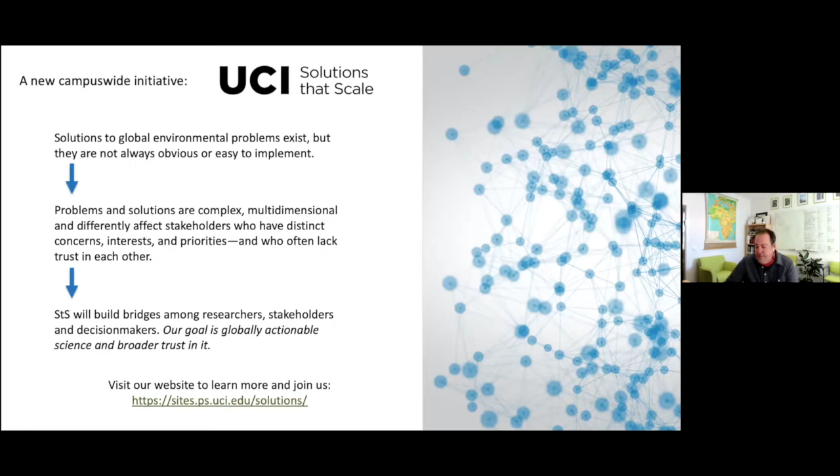This is why net zero matters, because we need to stop adding CO2 to the atmosphere in order to stabilize global temperatures. The net is because it may not mean that we've completely eliminated CO2 emissions to the atmosphere, but there may be ways of balancing the scales such that if we do have to add CO2 to the air, we're taking out the same amount on the other end to maintain the cumulative and thus stabilize the climate.

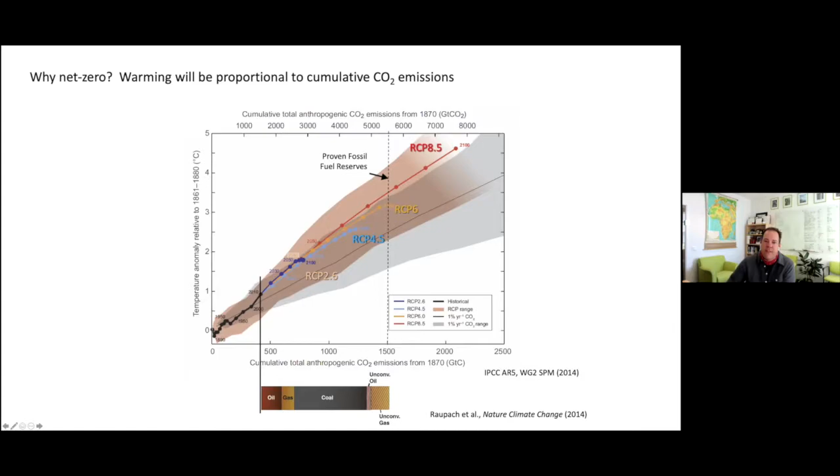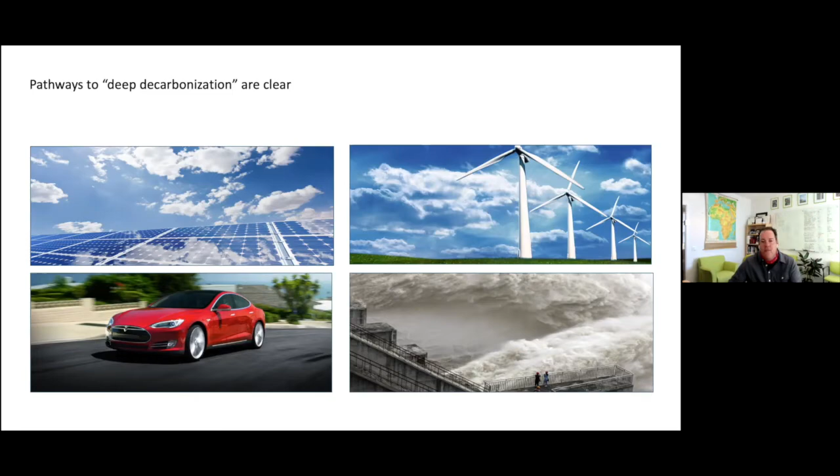But there are some modern energy services that we expect will be much more difficult to fully eliminate emissions from. And so, although that progress is there and we have a path on how to drastically reduce our emissions, this talk is going to make the claim that it's time to now focus on those harder pieces of the energy system and figure out scalable solutions that can work for them. So in particular, I'll spend the rest of the talk focusing on 3 different areas of energy and energy services that are going to be tough.

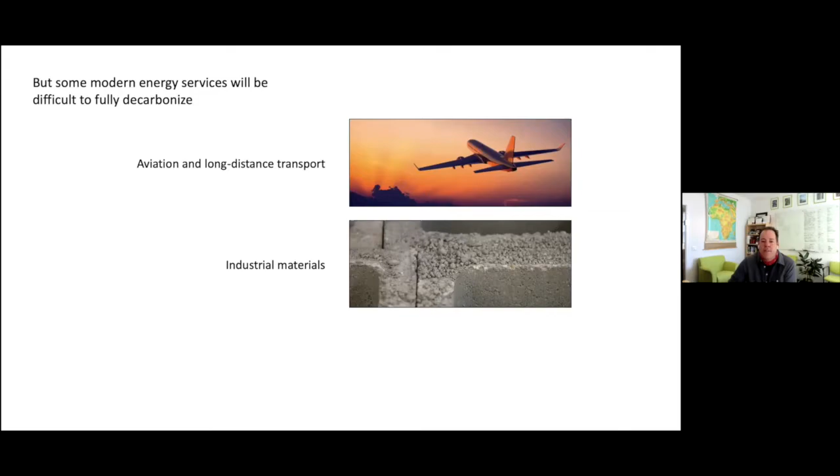So the first is aviation and long distance transportation. And the second is industrial materials. In particular, things like cement here or steel are things that are going to be a little more tricky than just light duty vehicles. And then lastly, we have those solar and wind technologies that are going to go a long way to getting us to a carbon-free electricity sector. But we need to figure out how we can completely eliminate fossil fuels from that sector and still maintain high reliability. And so I'll spend some time talking about that.

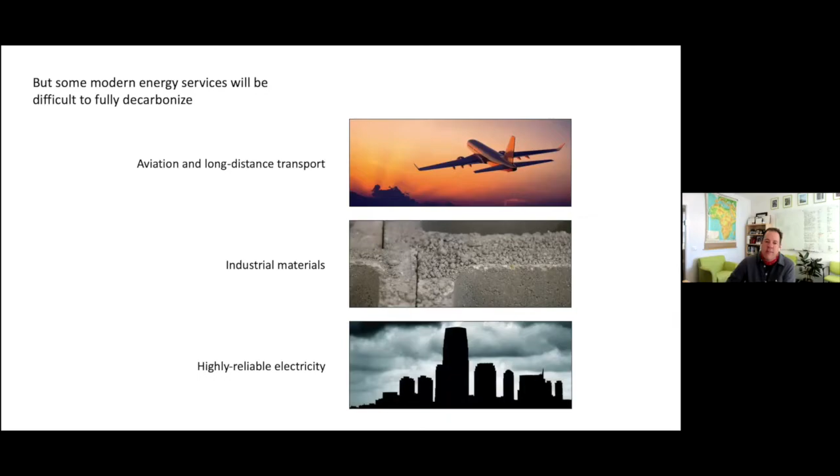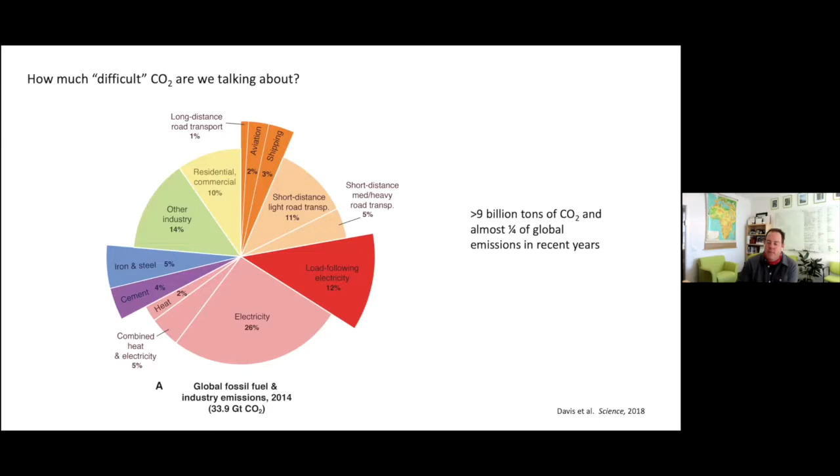And the point is that it's not the lion's share of the total, but it is a large amount. More than 9 billion tons of CO2 are from these tough parts of the energy system, so almost a quarter of global emissions in recent years. So let's start by talking about aviation and shipping and some of the longer distance transportation and freight. Fundamentally, what makes these tough is energy density.

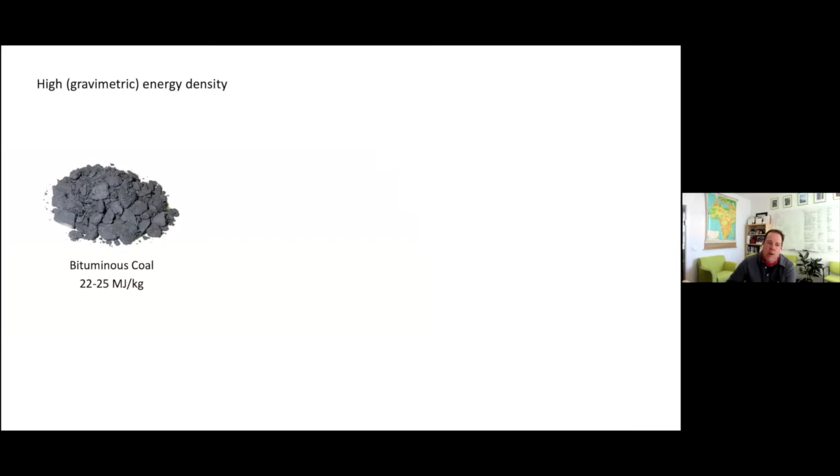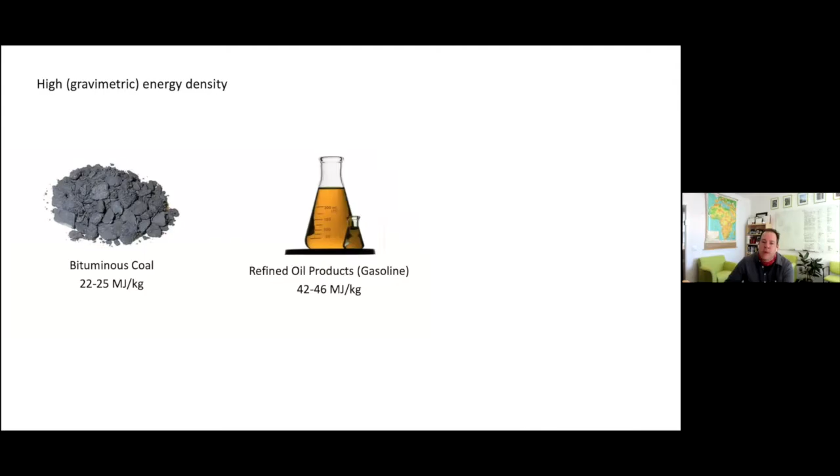So just to give you a little background, gravimetric energy density, or the energy per unit of mass of something like coal, is about 22-25 megajoules of energy per kilogram of coal. When you get to refined oil products like gasoline, you've almost doubled that, so you're at 42, 46 megajoules per kilogram of those fuels. In contrast, things like lithium ion batteries are still super low. We're at less than a megajoule per kilogram of the best lithium ion batteries today.

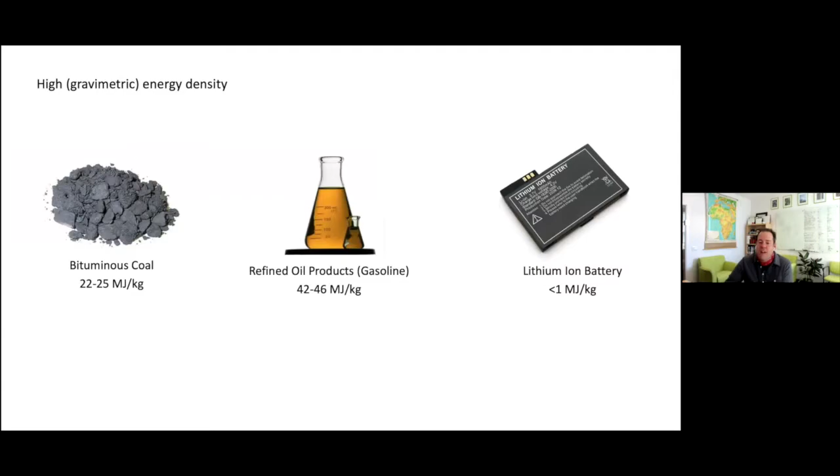This is telling us something about why it may be fine to have a light duty vehicle with a lithium ion battery pack that doesn't necessarily need a lot of range, but why it may be really difficult to fly a jumbo jet across an ocean with a battery powered airplane.

We could also think of energy density in terms of its volume. So hydrogen, because it's a gas, has enormous energy per unit mass. You see that 143 megajoules per kilogram. But when you start thinking about the volume, that gaseous state means that it takes up a lot of space for the energy. Of course, you can compress gases, but when you do that, you need to build containment, steel tanks and things like that weigh a lot and can withstand that pressure. And so you compromise the gravimetric energy density.

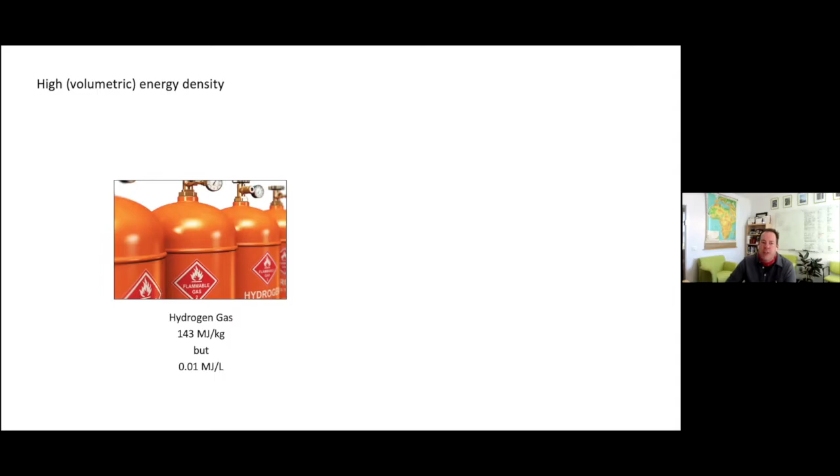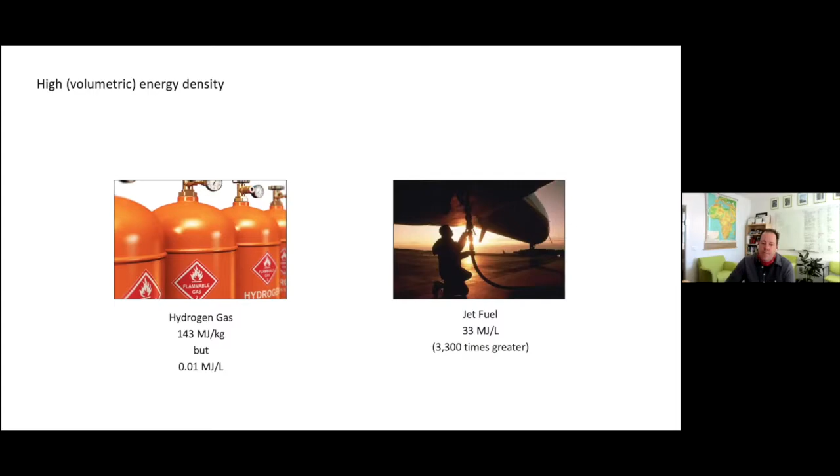But this is why gaseous fuels are a challenge for even transportation like aviation as well. So in contrast, jet fuel, more than 3,000 times the energy per liter. So all of this is to say why when we're using fuels to go a long way and haul things, we may need these high energy density liquids.

So this is not to say that it's impossible to electrify trucks like this. In fact, there are a number of companies that are pursuing that. It does mean, though, that we need to think carefully about developing systems that can depend on trucks, for example, that don't require such a large range or have modular battery packs that we can swap out, or perhaps are hybridized with fuel cells in order to offset some of the requirements of space and weight in the battery packs.

So what I'm here to say, though, is that I think for things like aviation and shipping, we may need liquid fuels with high energy density for a while, if not for a long time. So to think about that, how do we do net zero emissions, but yet have these high energy density liquid fuels? There are possibilities. So here, I'm going to build out this schematic over the rest of the talk. We have our demand for these different long distance applications here at the top. And in purple, I'm representing some hydrocarbon, so jet fuel or diesel.

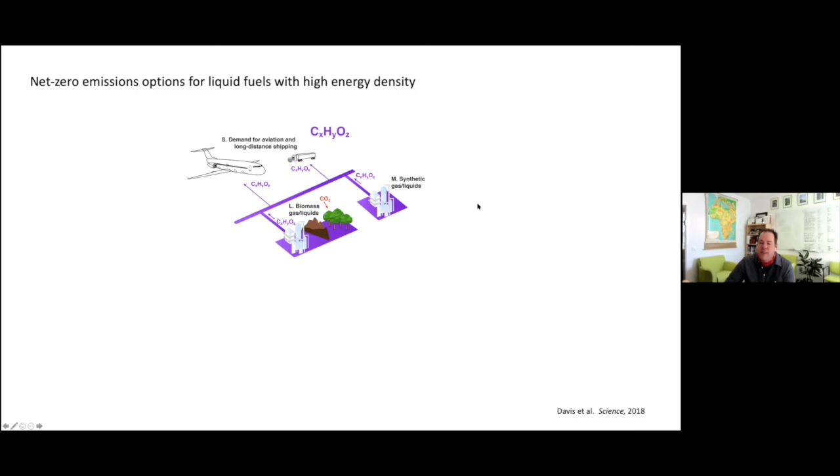The other option for a net zero emission hydrocarbon would be synthesizing our own hydrocarbon. But again, in this case, we're going to need to think of ways that can't involve any other CO2 emissions from fossil fuels. So as a starting point for both of these options, we need to have some way of energizing the processing, the manufacture of the fuels that doesn't rely on fossil fuels. So some source of non-emitting electricity, and I've shown some here in green.

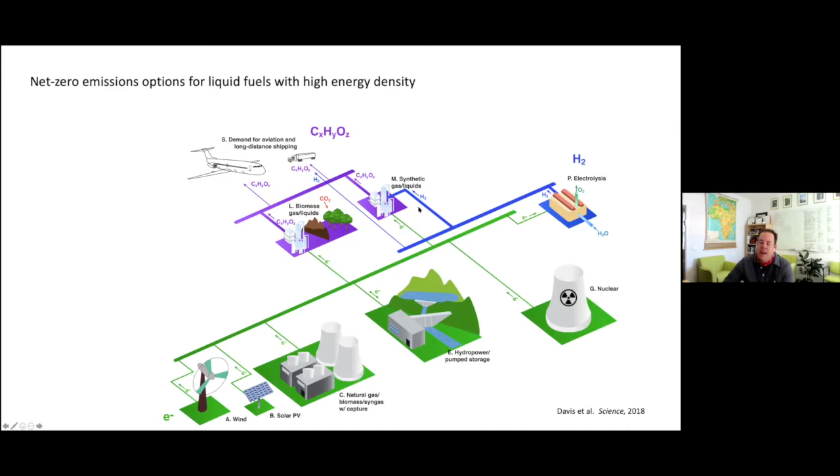In the case of synthetic fuels, if we want to make our own hydrocarbons, we need a source of hydrogen that's not fossil. And so this is where electrolysis comes in. We can use some of the electricity that we've gotten from a renewable technology, perhaps, and split the water to make the hydrogen we need for a synthetic fuel. And then, of course, the other piece of that hydrocarbon that's tough is the carbon, which, as I said, has to have come from the atmosphere.

And so direct air capture of CO2 that goes into this process is one way that we could imagine making those synthetic fuels net zero. It's also possible we could capture carbon dioxide that's being produced by industry in a process, and I'll say more about that in a little bit.

Just to round out other options, we could also, instead of making a hydrocarbon, divert some of the electrolytic hydrogen to make ammonia. And actually, liquid ammonia can be burned, has relatively high energy density. Some of the farming equipment in the United States actually burns ammonia. It's not necessarily the most attractive from the standpoint of the chemical itself being dangerous and possibly NOx emissions, but it is something that we could look into.

And then further off in the future, there are folks here at UCI, like Jenny Yang, who's interested in the prospect of making fuels directly from solar energy. And this is something that's been proven in the lab. It has a long way to go before it could be commercialized.

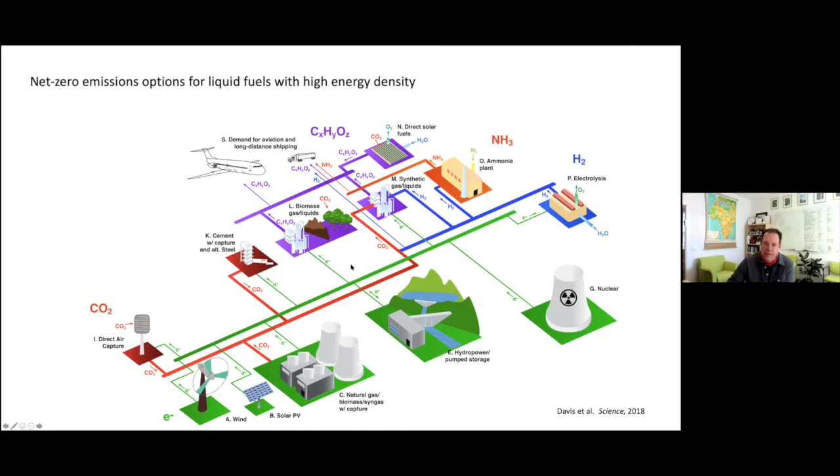So a lot of those options you saw, whether it was ammonia or the synthetic hydrocarbons, really rely on having electrolytic hydrogen. So I wanted to spend a moment to talk about that. Right now, most of the hydrogen we use in our society comes from the process called steam methane reformation of natural gas, of methane. And that process entails CO2 emissions. So we're taking the carbon off and letting it out into the atmosphere. And it's a fossil source of carbon. So it's not a climate friendly one, but it can produce hydrogen at about $1.50 per kilogram.

Unfortunately, right now, the options of taking a renewable source of electricity and using an electrolyzer to make that hydrogen in a more climate friendly way is considerably more expensive. So really the cost of electrolyzers are a major barrier. Right now, we're upwards of $4 if you factor in the average cost of electricity and the current electrolyzer costs. So we have a lot of progress to make, and folks like Jack Brouwer in engineering are actively working on this and very optimistic about the ability to drive down the cost of this electrolytic hydrogen in the future. But this is a big priority.

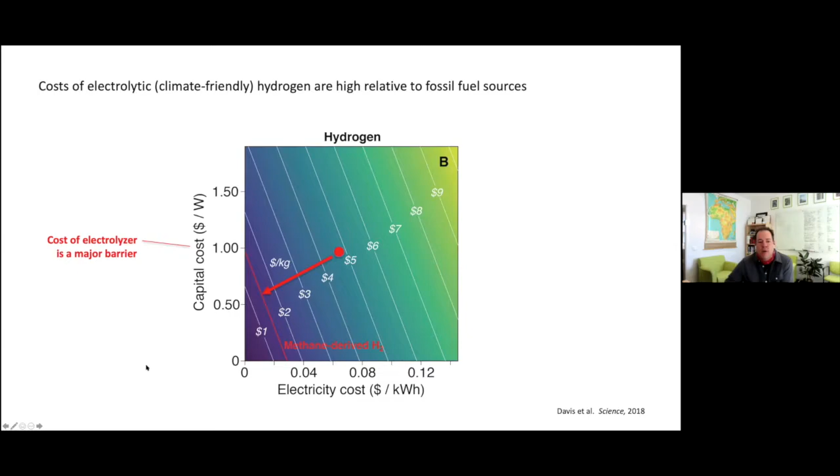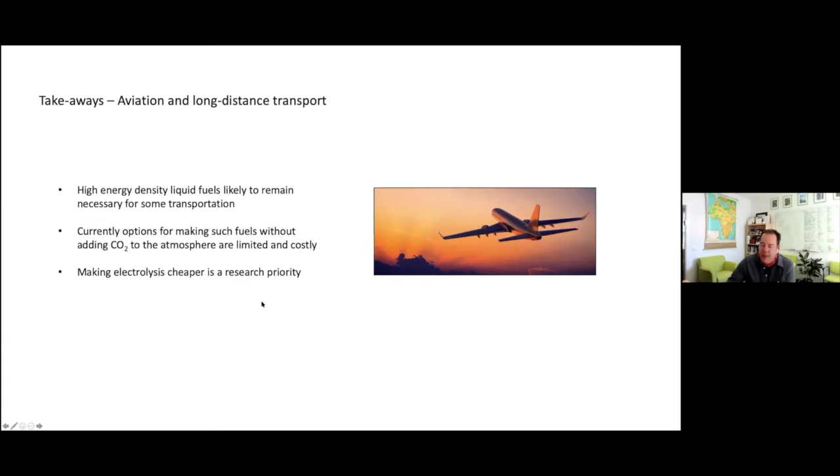So the takeaways on the topic of aviation and long distance transport are that these high energy density liquid fuels are probably going to be necessary for some time to come, and perhaps always for things like international aviation. The current options for making those fuels without adding CO2 to the atmosphere are limited in the case of biofuels, where we're worried about land area, and or costly when we think about the current costs of hydrogen production by electrolysis. And as I said, that's why making electrolysis cheaper is a real priority.

So I'm going to shift gears and talk for a minute about industrial materials. And in particular, as I said, I'll talk about cement and steel. Roughly 8% of global CO2 emissions is related to cement. And that actually belies the fact there are two different sources of CO2 from cement manufacture. About half of those emissions are what we call process emissions. And they're the CO2 that come from this process of calcination.

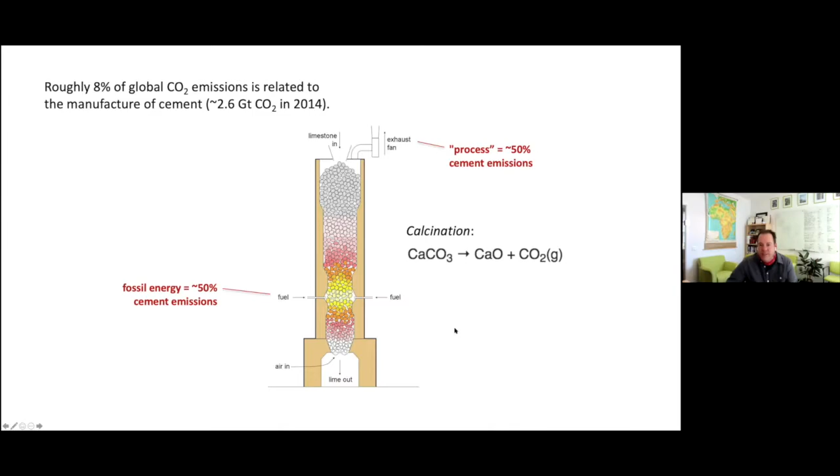So to make cement, we heat up limestone to 1300 degrees C, and that leaves us with this calcium oxide or lime, and it drives off CO2 from the calcium carbonate of the limestone. That's the process emissions, and it's about half of the total, the other half being the energy, which is usually fossil fuels, coal or natural gas. So even if we're successful in coming up with ways of getting that high heat without emitting CO2, maybe we come up with electro heaters, we're still going to have to contend with these process emissions.

And the story is similar for reduction of iron ore. We can get some amount of our demand for steel from recycling materials and electrifying the process, but to the extent we need to reduce raw iron ore, that process, at least today, uses something called coke, a form of coal. So there are ways of changing these processes, for example, using hydrogen as the reductant to avoid the need for coke in the process. And that would be a way of avoiding some of the process emissions from the steel.

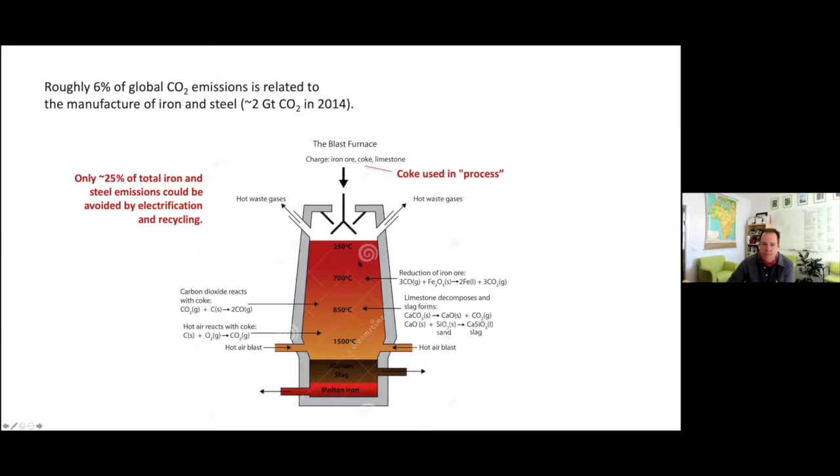So if I come back to my schematic, and here I've added the demand for industrial materials at the top, what I've just said is that we may have options of coming up with alternative processes. We could also think about being more efficient. And I've swapped in this plot just to show that right now, at least in the last 15 years or so, we haven't made a lot of progress worldwide at using less cement and steel in our economies.

In fact, in advanced economies like the US, we use about 1 kilogram of steel and cement per person per day. So you're obviously not using that yourself directly, but it is being used on your behalf. So we could think about also driving down the demand for some of those materials; that might be a really important way to avoid emissions.

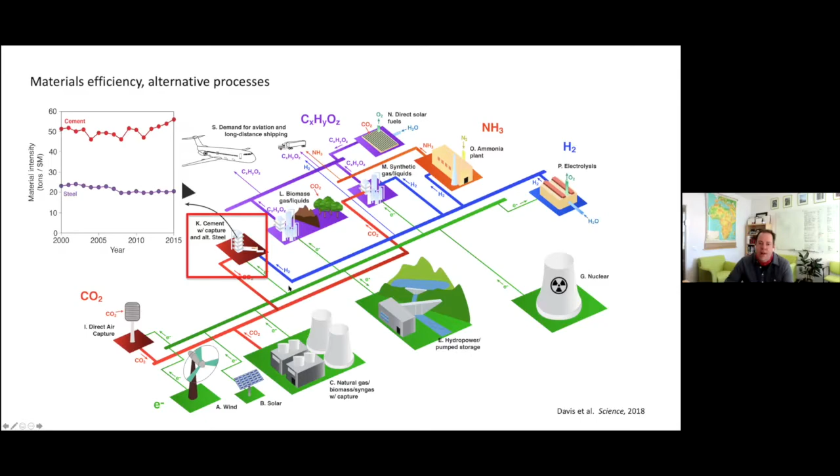And then I've added this link to perhaps use electrolytic hydrogen for things like steel. So we're drawing in our diagram. But the other option that gets talked about for cement and steel and industries like those is to capture the carbon that's produced from those processes and then either use them for something that would store that carbon out of the atmosphere or store that carbon out of the atmosphere perhaps underground, so CCUS. And those are options that may be important in the near term.

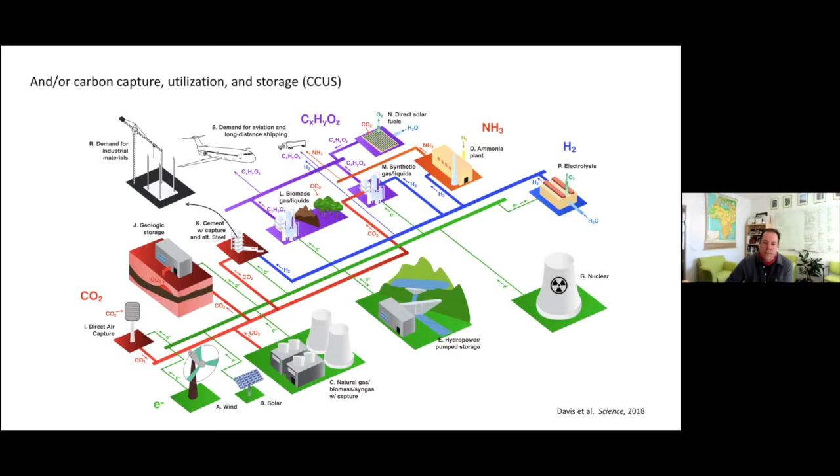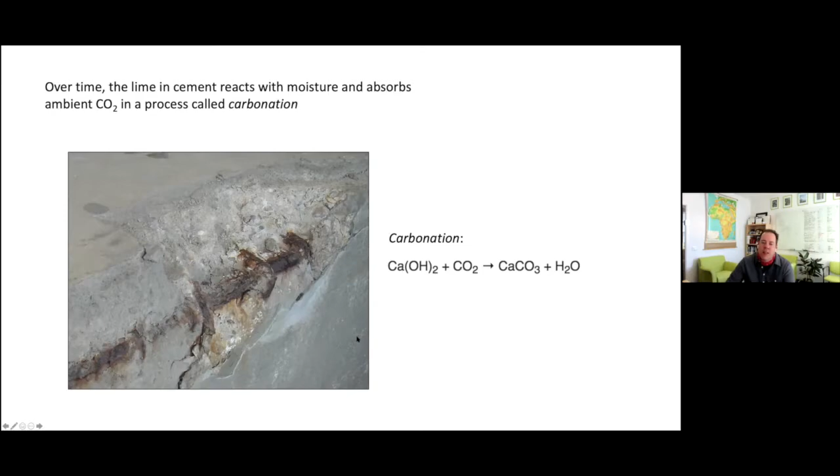So some work that my group has done is actually looked at this reverse process to calcination, something called carbonation. And it's something that structural engineers have known about for a long time, that when you have cement in place, it does take up ambient CO2 from the atmosphere over time, and it reforms that limestone. This isn't necessarily a good thing. As you see in the picture here, it changes the pH of the concrete and actually can lead to corrosion of reinforcing metals.

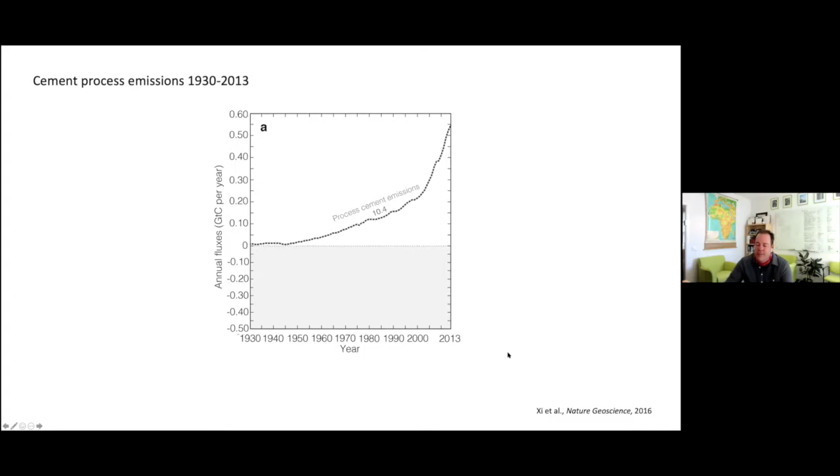But it is a good thing from the climate perspective, because the work we've done at least shows that of the total process emissions over this long time period from 1930 to 2013, we think actually all of the cement out there that's been soaking up ambient CO2 has offset perhaps as much as 45% of the process emissions in recent years. The reason I take this aside is that this is another option for trying to reduce or avoid the addition of CO2 to the atmosphere. If we can come up with processes that accelerate this carbonation process, we can offset some of the emissions that are happening when we make cement.

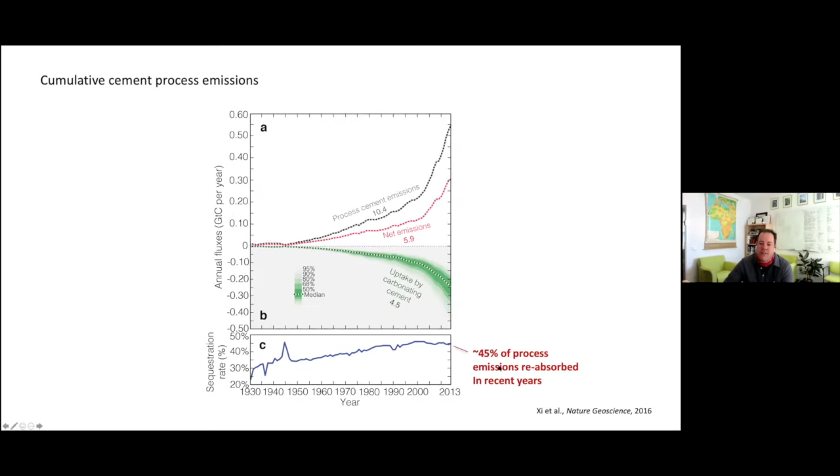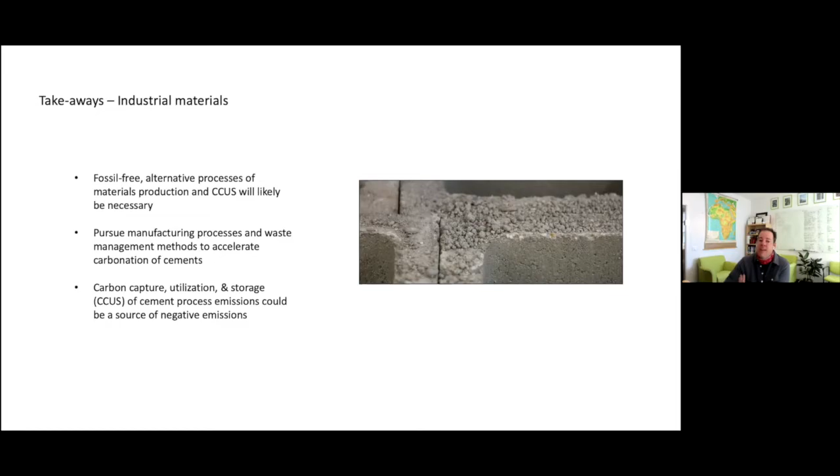So to summarize on the industrial materials, we need to come up with fossil-free alternative processes for making these materials over the long haul, and ones that can avoid some of those process emissions. In the meantime, as I just mentioned, we can also pursue options for making and managing waste of cement, for example, that could accelerate that carbonation. And eventually, if we're able to capture and store process emissions from, say, the making of cement, then as the cement goes out in the world and is soaking up CO2, that's actually a source of negative CO2 emissions, which could help us on the climate front.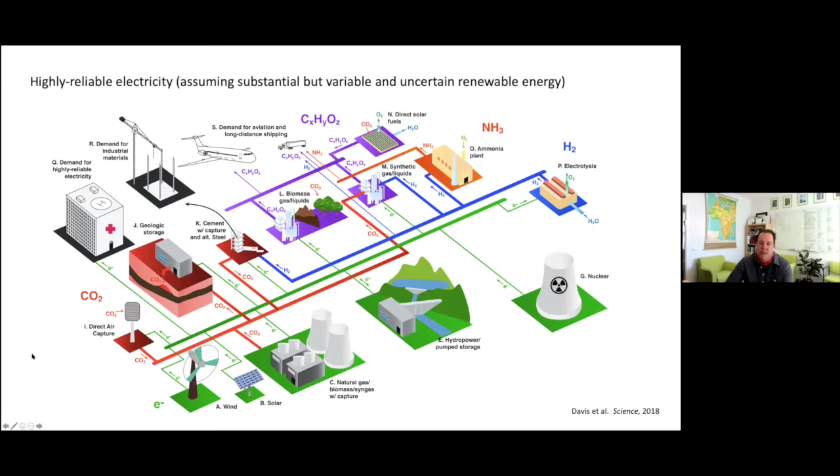So I'm going to spend the balance of my time talking about electricity. As I've said here, we need highly reliable electricity in our system. The sort of specifications for the US are that we can have a few hours of outage every decade. So we really like a high level of reliability. It's important, especially for some of our industrial activities. And so how do we get that in a system that's heavily reliant on variable sources of electricity like wind and solar? So the answer is that we're going to need some combination of flexible generation, or what we might call dispatchable generation, as well as maybe some demand management. So these are the flexible sources, could be things like nuclear or hydropower.

Demand management, the idea is, well, if we don't have as much electricity being generated in a given moment, perhaps there are ways that we can manage our demand in order to turn down that demand and balance the system that way. And there are opportunities there, as well as storage. And so by now, I think most people think of storage and they think of lithium-ion batteries, which is one option. There are other things that we do to store large amounts of energy, things that are looked at like hydro, where you pump the water uphill when you have the power and let it out later, compressed air storage, or even some forms of thermal storage like molten salts. So all of these things are on the table to help us balance the variability of wind and solar.

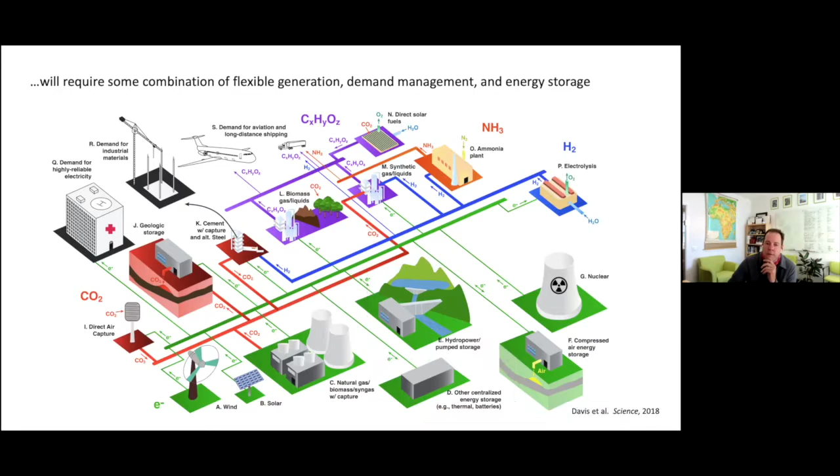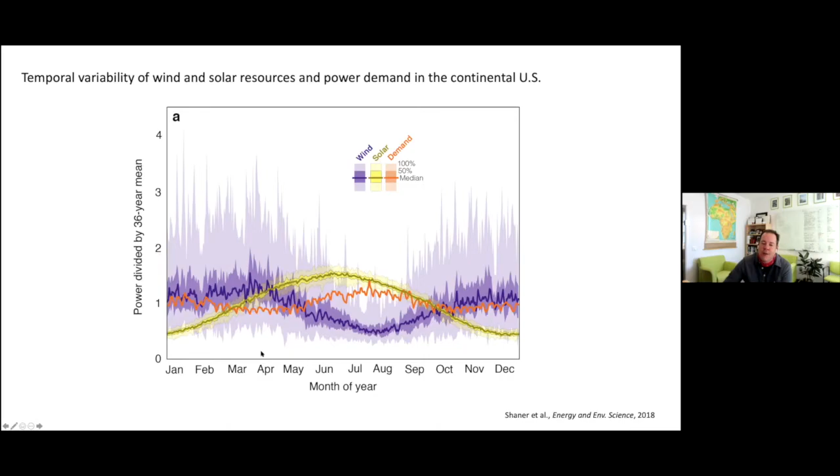So this shows that wind and solar can be somewhat complementary in terms of wind taking up the slack in the winter time and solar covering us in the summer. And that's why some mix of these things is probably going to be ideal.

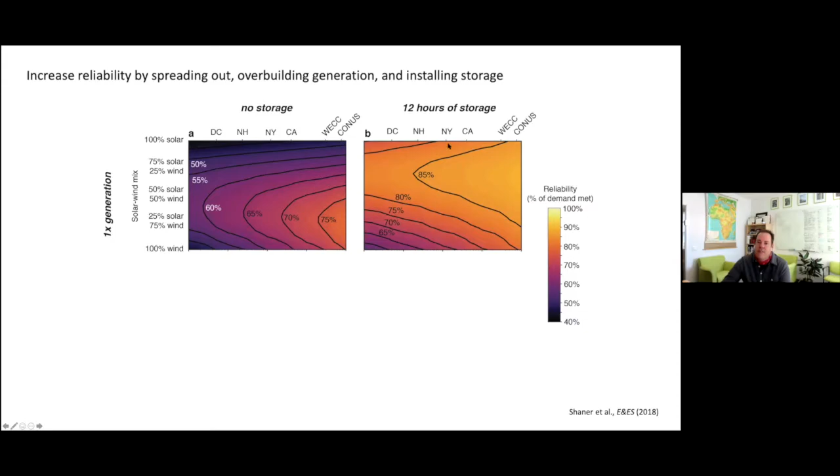If we add the ability to store 12 hours of mean electricity demand, you see what happens is, first of all, you get more reliable. Obviously, we're going to be able to store stuff. That'll help us. But you also shift the mix away from a wind-heavy system and into a more solar-heavy system. This is because with 12 hours of storage, you're able to overcome night, essentially, the diurnal cycle of solar generation. You can also see that you can do high reliability, or at least into the 80%, at a smaller geographical scale. So you don't need to spread things out as much.

And in fact, I think this is an interesting thing to point out, that at some point, the US and other economies for that matter may need to make a decision whether to pursue a system that's more reliant on wind and transmission over large areas, or more reliant on solar and dependent on considerable amounts of storage. These are sort of two different options.

Now, I need to point out that 12 hours of storage may sound very reasonable to everyone listening, but in fact, that's a tremendous amount of energy storage. Right now, we only have perhaps an hour or two of storage in total in the US. And 12 hours, if we wanted to get that much with lithium ion batteries, for example, would be about 150 years of production from Tesla's biggest battery factory, the Gigafactory. So this is a very large amount of energy storage, even though it may not sound it. And one thing that, yeah.

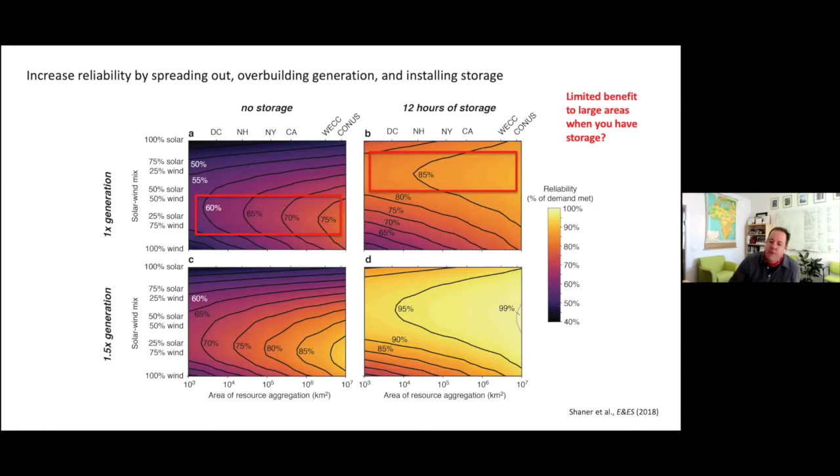But regardless, I think we have a challenge in terms of just the magnitude of trying to get to that level. Yeah. Thanks.

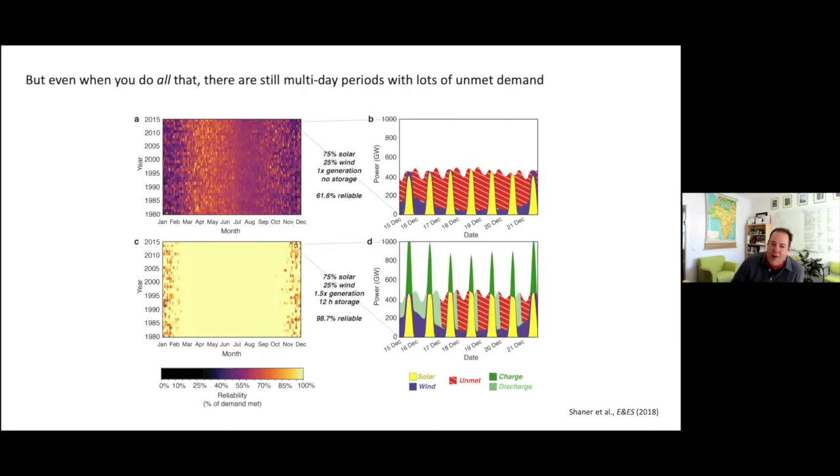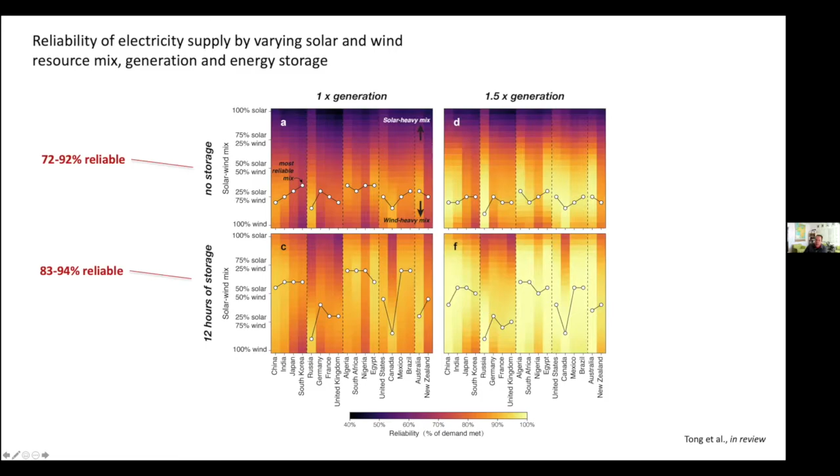So in that same study, what we've done is to look at the gaps. What we've shown is that you can cover a lot of the hours a year with solar and wind, but when you look at the characteristics of the hours when power demand is not being met, that tells you something about what kind of backup technologies you might need.

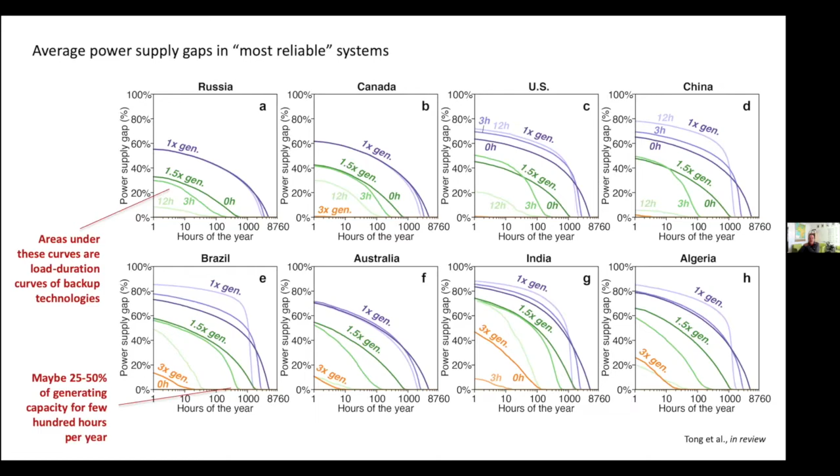But it's important to note that maybe 25 to 50% of your entire generating capacity would be necessary for a few hundred hours a year. That actually really defines the challenge, because it shows that if you wanted to do that with something like a lithium ion battery, you're only going to be using it a fraction of the year, but you need a lot of them. 50% of electricity generation is a whole lot. So that's a challenge economically.

So just to put it a different way, given the fact that these gaps are large but infrequent, the utilization rate of anything backing up the system is going to be low. And that's why we tend to want to find electricity sources that are going to have low fixed costs. You don't want to build something super expensive and then only use it very rarely. If you are only going to use it very rarely, you want it to be cheap, with most of the cost associated with

running it. That's why, for example, we like natural gas in our current system, because it's dominated by the cost of the fuel, not the cost of the turbine itself. So what we need is something like a natural gas fired turbine, but without the CO2 emissions.

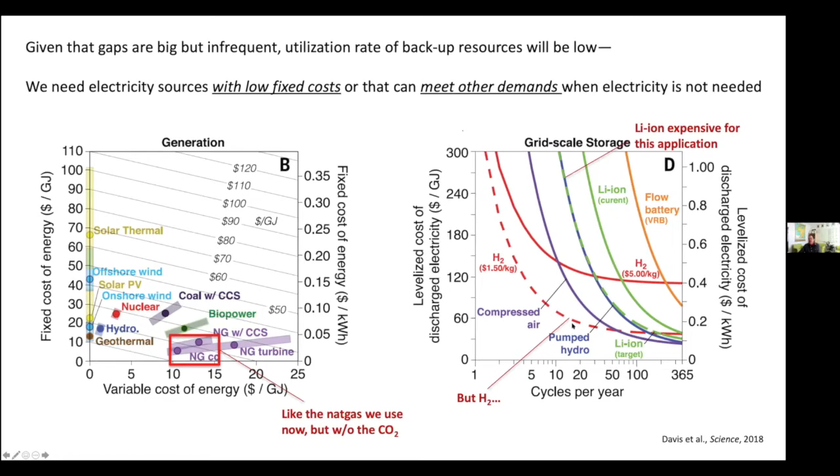And that's why if you're using something like lithium ion, you're going to have a hard time if you're not using it often. It gets very expensive. You know, this is equivalent to close to $1 a kilowatt hour. In contrast, if you're using something like hydrogen, you can cycle it quite a bit less. So now I want to talk about why that might be.

So hydrogen is interesting because, and here I'm showing it as PGP, which is what we call power to gas to power, using electricity to make hydrogen and then using that hydrogen in turn later to make electricity, is attractive because it's dominated by costs of power capacity and not energy capacity. So what I mean by that is that the cost of an electrolyzer is to do with how much hydrogen it can make in a very short amount of time.

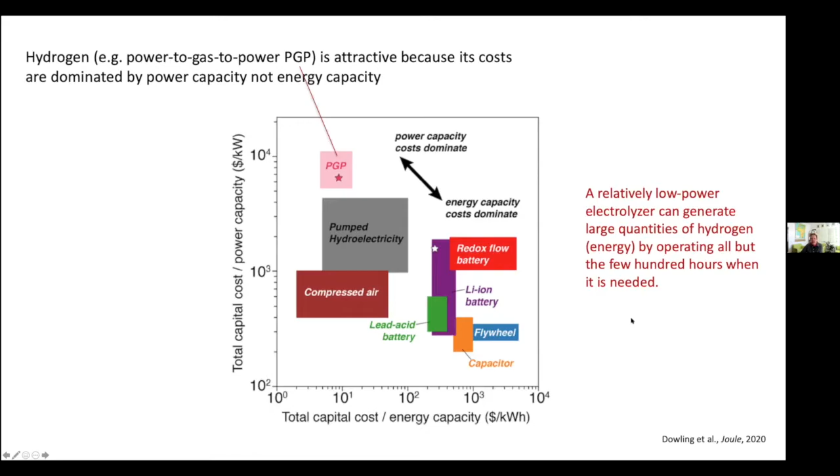But when we have the luxury of an entire year, we can buy a relatively low power electrolyzer and generate very large quantities of hydrogen energy that we can use later. So we're only going to be actually burning that hydrogen or putting it in a fuel cell a few hundred hours a year. The rest of the year, the thousands of hours, this small electrolyzer can be generating that fuel.

So in this study, we looked at a system that was solar and wind only, and we allowed it access to both lithium ion as well as a power to gas to power storage technology. And we put current costs in and modeled it economically. And what you see is that the lowest cost system uses both lithium ion batteries and hydrogen here on the top, but in very different ways.

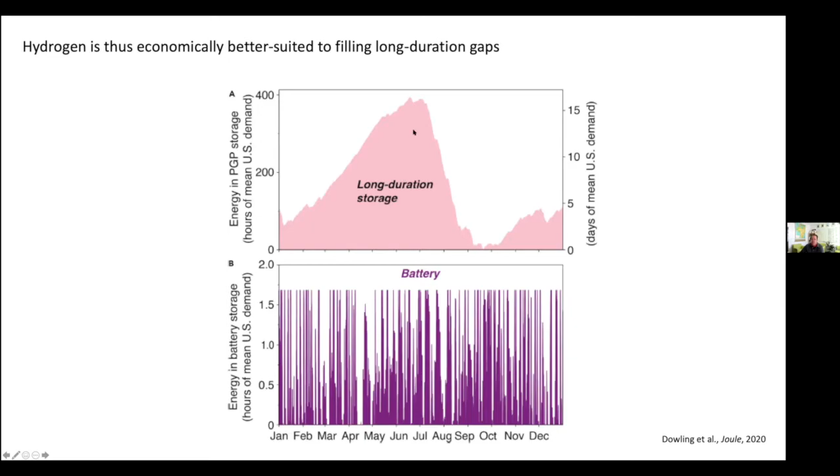So over the course of a year, which is the horizontal axis here, we see the batteries are being cycled on a near daily basis to cover you in the evenings, let's say, when solar is not being produced. In contrast, what happens with the hydrogen is very, very different. You see that essentially the hydrogen is building up over the entire winter and spring, and then it gets drawn down in a very short number of weeks during the late summer, during the doldrums of the wind, really. So this is something that's a daily technology when you look at the lithium ion batteries versus a more seasonal setup in the case of the hydrogen.

And in fact, when we look at the cost of an entire system that's relying on either solar only in these three bars or wind only or a combination, what we see is that consistently when you add some form of long duration storage, and in particular here it was a hydrogen-based system, you're always going to decrease the cost of the system relative to a system that didn't have that and rather only had lithium ion batteries.

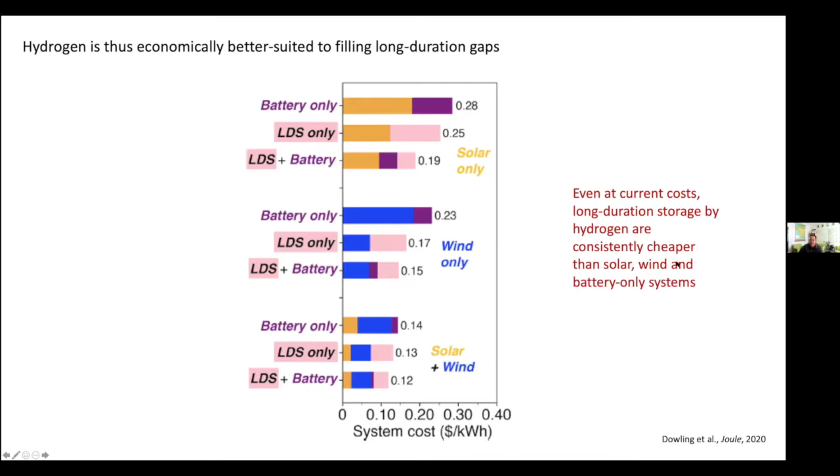And we think this is a very important finding because states like California, for example, that are interested in relying almost entirely on solar and wind have been imagining building a lot of lithium ion batteries to back up that system. Those batteries have a lot of value, but what we're showing is that adding on the capacity to have a longer duration storage technology, perhaps hydrogen, would already make the system cheaper, even at current high electrolyzer costs.

And then finally, just to make the point, because I've hit you with hydrogen several times here, not only does hydrogen have this potentially exciting role in long duration storage, but it also would go a long way to helping us integrate the electricity system with transportation. Remember, I mentioned hydrogen in the context of synthetic hydrocarbons, as well as the industrial sectors. So again, I mentioned hydrogen as a potential reductant in the steel industry. This means that we could really use the capital of an electrolyzer constantly to supply different demands in our energy system. And so that's why a lot of people are excited about hydrogen these days, including here at UCI.

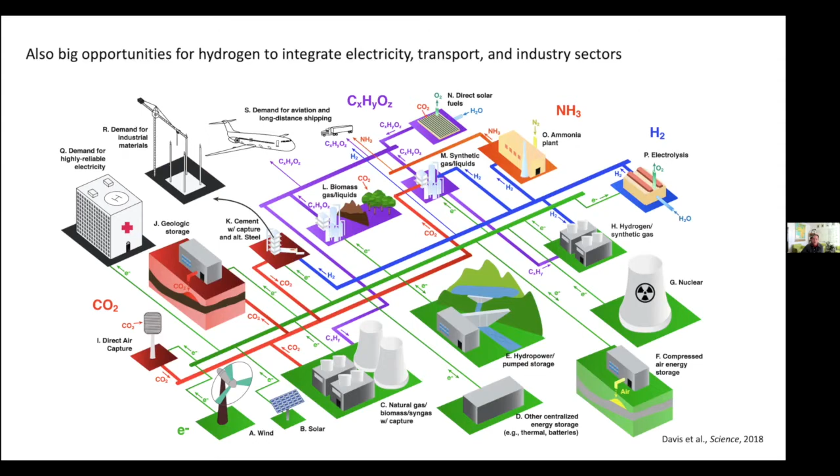So the takeaways on this electricity part of the talk are that the geophysical variability of solar and wind resources define the need for some kind of a backup technology if you want reliable electricity. And that may come from a combination of flexible generation sources, demand management, and energy storage. But we know by virtue of the gaps that we probably need to look at systems that are low capital costs or have flexible uses, as I mentioned. And our best economic analyses so far show consistent benefits of long duration storage with hydrogen.

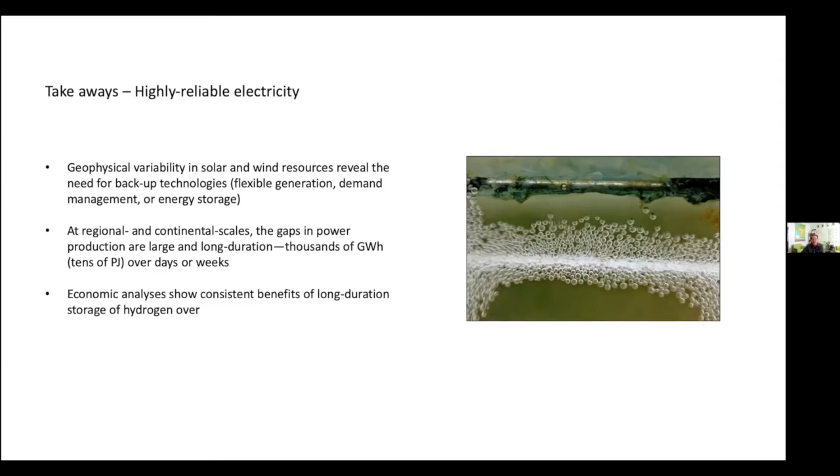So to wrap up, I started out the talk by pointing out that we have tremendous prospects for decarbonizing our energy system in the near term. There's a lot of runway to drive down emissions to very low levels relative to the present. But that said, I think it's already time for academics and business leaders to start seriously contending with some of the remaining challenges. We can't wait until we're 80% reduced in our CO2 emissions to start addressing some of the more difficult pieces of the energy system that I've talked about.

And those are different challenges than what we're looking at with electricity generation at the beginning of our decarbonization process, or light duty vehicles. And we really need to coordinate and analyze the potential of different technologies at a system level and in coordination with policymakers and businesses.